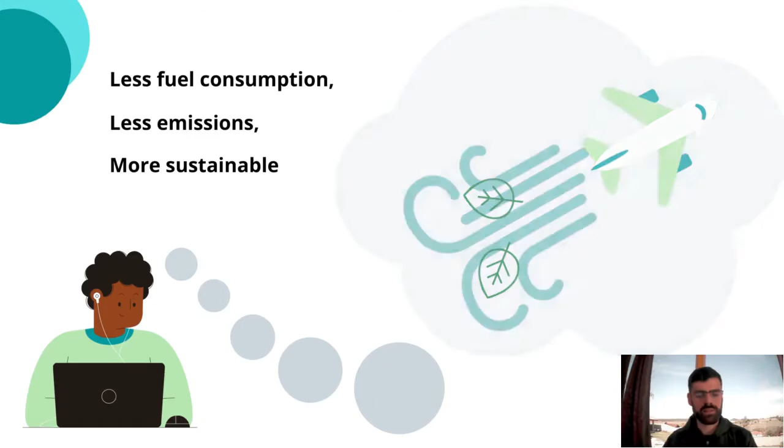At this point, one may ask, okay, we want to make aviation more sustainable, but how can we do that? As an applied aerodynamics researcher, I dedicated my master's work to investigate the camber morphing winglet impact on a business jet's fuel consumption, aiming to help the aviation industry move towards a greener scenario by developing a technology applicable to future aircraft projects.

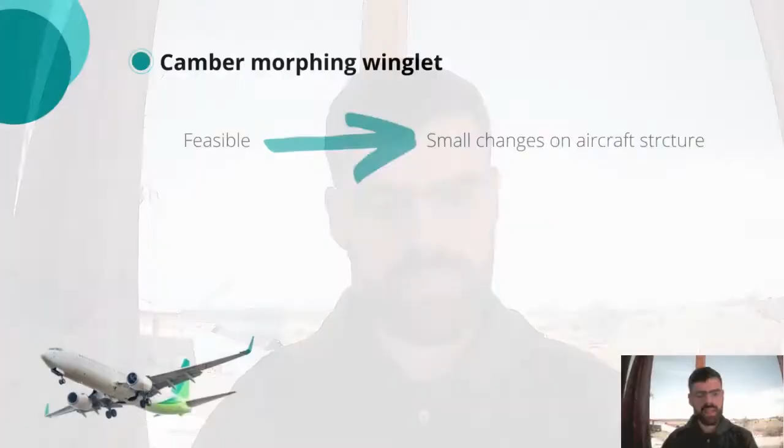Technology overview shows that winglets are a well-known solution for aerodynamic performance improvement, being widely used in different aircraft categories. The idea of evaluating the aerodynamic benefit of applying a morphing system capable of adjusting the winglet section's camber according to the aircraft flight conditions is based on two cornerstones: improvement potential and feasibility. We expect that the camber morphing winglet concept would significantly improve the aircraft performance, reducing fuel burn without excessively changing the aircraft geometry and/or affecting flight safety.

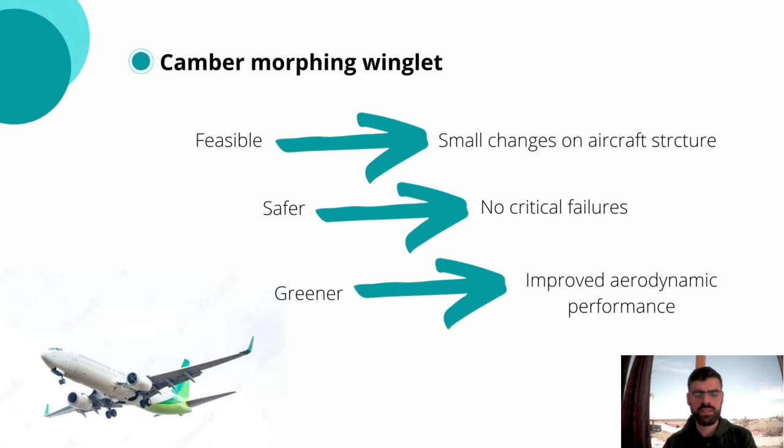Those concerns on the system design are fundamental for reaching a feasible and certifiable technology, increasing the concept application in the industry. The morphing winglet concept is capable of adjusting the section's camber for optimum performance by changing the leading and trailing edge angles. The investigated morphing winglet presented a rigid central portion between 25% and 75% of the section chord length to keep the winglet structural box unchanged. Fixed leading and trailing edge plugs are used, ensuring that the camber changes would not result in unfeasible, wavy, or not smooth surfaces.

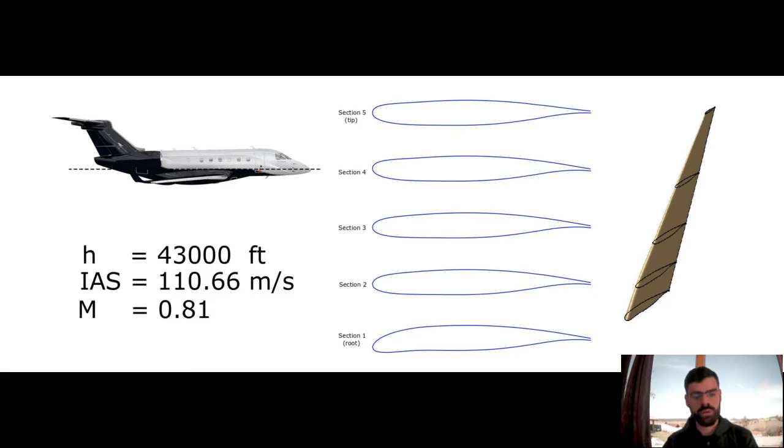A genetic algorithm was used for optimizing the winglet aerodynamic performance on a typical business jet mission by changing the section's camber for each flight condition, enabling optimum performance over the whole flight envelope. The optimization algorithm searched for the winglet configuration that minimizes the aircraft total drag at flight conditions determined by a flight performance simulation code. The BLWF code was used for evaluating the configuration drag based on the aircraft's weight and speed.

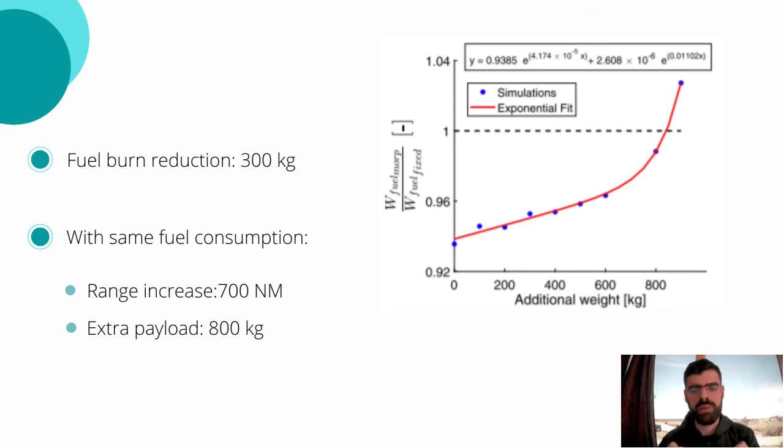The aerodynamics and performance simulations show that the camber morphing winglet reduced the maximum range mission fuel burn by 300 kilograms. Also, the performance improvement enabled flying 700 nautical miles longer, or carrying 800 kilograms of extra payload on the maximum range mission with the same fuel burn of the baseline fixed geometry winglet. Those results exceeded the initial expectations and drew the aeronautics academy and industry attention to a feasible technology with great benefits on aircraft fuel efficiency.

The results are promising, but an analysis of the actuation system weight and power requirements and its structural and aeroelastic impact is necessary for finishing the proof of the concept. Yet, the possible beneficial interaction between the morphing winglet and aircraft structures, like a load alleviation system, increases even more the enthusiasm around this technology.

With such promising results, these studies make room for further investigation and system development on this concept, being a kickoff for developing this technology. This pitch is an invitation for discussing and creating a network so we can keep developing solutions that may contribute to make aviation and our society more sustainable.